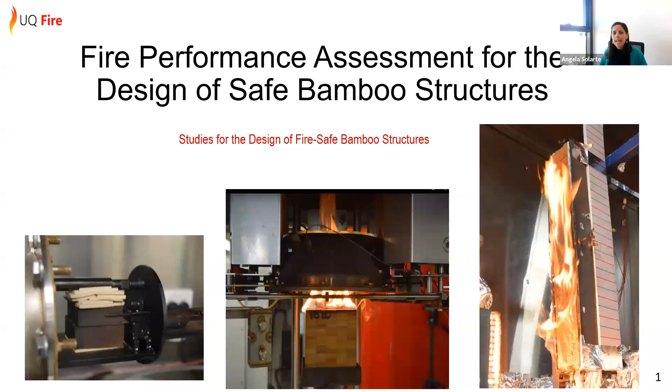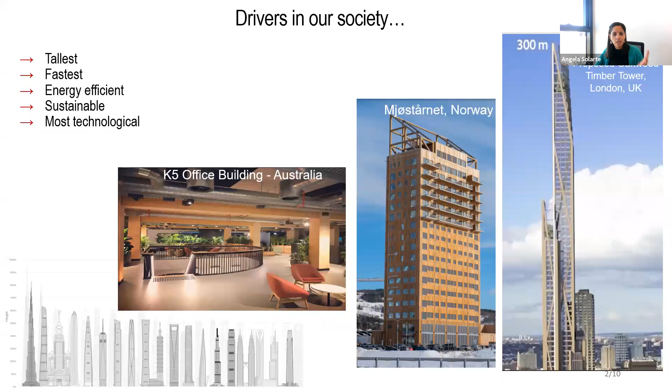It starts with the motivation. I think many of our projects are motivated because our society is pushing us in a very fast way to develop the tallest, fastest, most energy efficient, sustainable, and technological buildings. I come from industry, and I was able to see how much we did not prioritize safety and fire, and therefore we are including all these novel materials without understanding exactly what the consequences are, just thinking that we know, and developing engineered bamboo products, which are great, and aluminum composite products as well. But why are we doing this, and what can the consequences be?

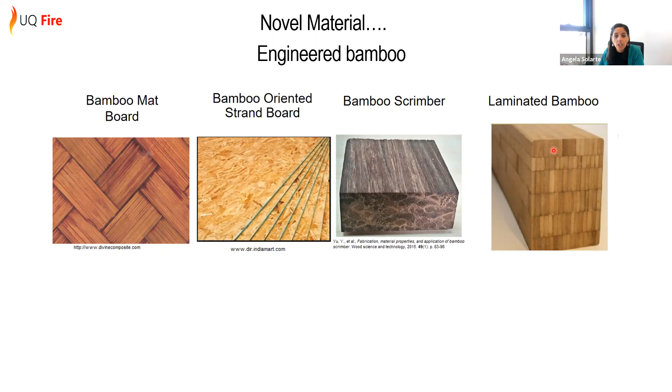So bamboo is not necessarily a novel material. We have had it since ancient times. However, we have started to engineer our bamboo, transforming it into very good construction materials, such as the mats board you can see in the picture on the left, like the mats board or the oriented strand board, the scrimber, or laminated bamboo. If you look at this picture, it looks very much like a timber beam, a CLT, or glulam, with the difference that bamboo has more small strips comprised in the laminate. You can see very small strips that are glued together to become this big beam.

Why are we introducing these materials now into construction? For their structural performance, in previous years there have been increased studies showing how great the mechanical performance of bamboo is. It has a high strength-to-weight ratio, and has been proven to some extent to be better compared with hardwoods rather than softwoods like Douglas fir, which we are using in our buildings today. Architects also love the finishing, and we are including them in products like floors, ceilings, walls, facades, etc. The good thing is that it's a really fast growing grass that reaches maturity quite quickly, and therefore it's able to sequester 30% more CO2 than pine trees.

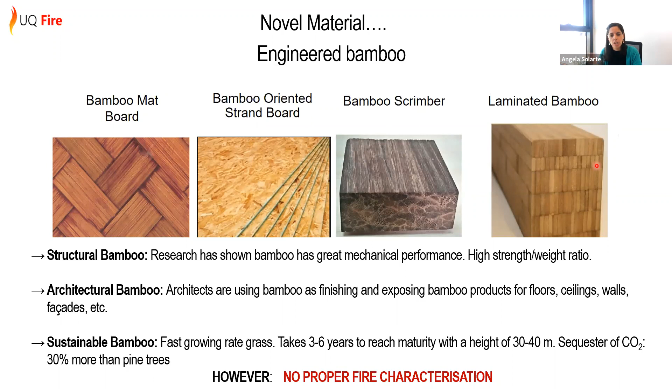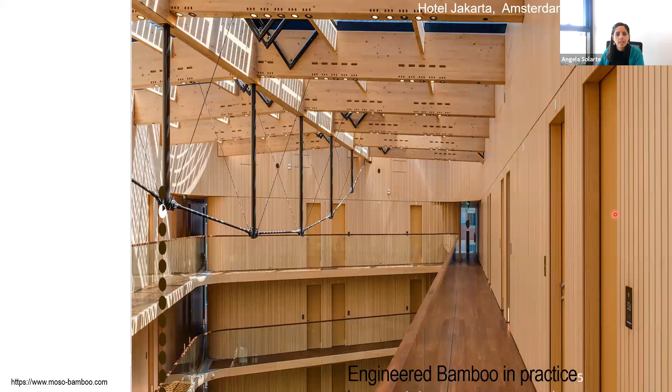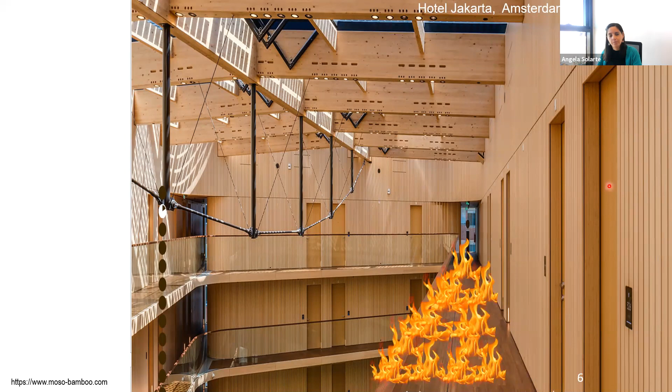But what happens if we have a fire? Do we really understand how much time we have for evacuation, and how much time we have before flashover? We all know that for performance-based design, we need to understand and guarantee that the available safe egress time is much, much greater than the required safe egress time. We know that we are confident in following our fire curve for non-combustible structures, where we are able to know when the growth phase happens to design for egress before flashover occurs. Then we are able to understand the fully developed phase and therefore design for the structural integrity of our structures.

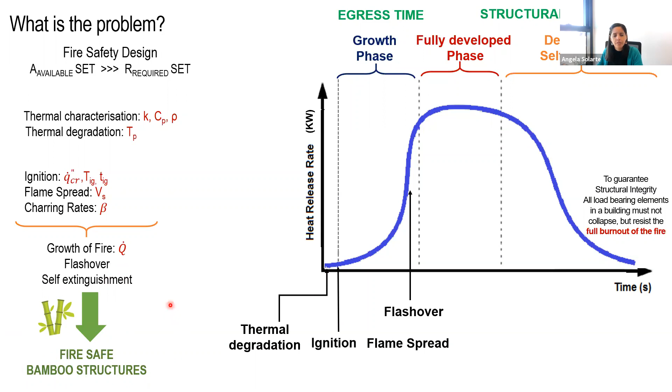To guarantee structural integrity, we know that all load-bearing materials in a building must resist burnout, so we are having to guarantee that a decay phase happens. But now we are introducing bamboo to cover buildings, as you saw in previous pictures. Do we know if we are covering them, or designing them, to be fire-safe bamboo structures?

So if a fire happened, what will be the behavior during the growth phase, and what will be the flashover times? Will it potentially be earlier than what we had initially designed for? Our people may not have enough time to evacuate, or potentially we are increasing the energy that our structure is receiving, compromising the integrity of our structure by increasing the fully developed phase and increasing the energy.

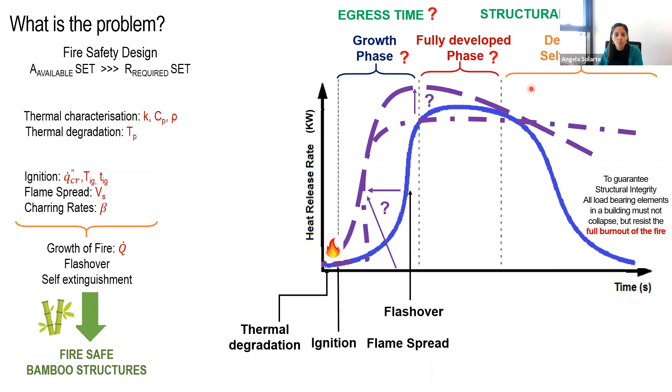And of course, if we are looking into structural integrity, are we sure that this material will be able to decay? And if it will, when and under what conditions? So all of this brings new unknowns, and for us to be able to do a performance-based design, we need to understand and start eliminating all of these interrogatory questions around what these unknowns are.

So the main objective of this research was to establish the fundamental groundwork towards performance-based design for bamboo structures. So this model was developed where, as previously seen, we are correlating each of the different phases of the fire - the growth phase, the fully developed phase, the decay phase - according to the parameters of the material, characterizing our material in these terms.

The growth phase looks into the flammability parameters of bamboo. The fully developed phase also looks at the thermal evolution and how this will occur inside the material, and whether we have self-extinguishment and hopefully achieve a decay phase - when and under what conditions that will happen. This will potentially drive us to a performance-based assessment.

But before that, we need to include, on the left-hand side of the diagram, the first information from the thermal characterization of bamboo, to understand when pyrolysis and degradation of the material happens. In the case of bamboo particularly, it's very important because of the different small pieces inside one beam column, to understand the different effects that adhesives can play as part of the input, and the different orientations that the lamella may have as part of the inputs.

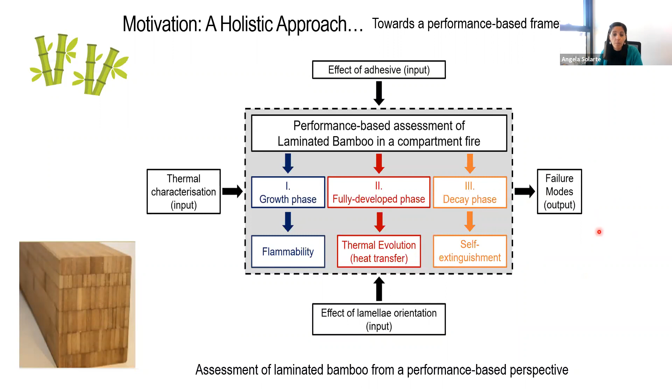So the previous model is now turned into a methodology, divided into 5 main categories. We start with the thermal characterization - here we see the input model as well - then flammability, to understand and look into the growth phase and start building the curves and the information that was lacking. Then the thermal evolution, looking into the fully developed phase.

Understanding how a bamboo compartment will develop - how much energy and how long this will take before we reach self-extinguishment, hopefully, and if we do, under what conditions. Failure modes, again in this project, is just an initial hypothesis based on the information that we have. To understand the difference of the components, we started testing 3 different types of bamboo.

The species chosen was only one - all 3 different types of bamboo are from the same species, Phyllostachys pubescens. But 3 different samples were chosen to assess and understand the effect of the adhesives. Sample A was manufactured with urea formaldehyde, polyurethane. Sample B with phenol resorcinol formaldehyde, and sample C with phenol formaldehyde.

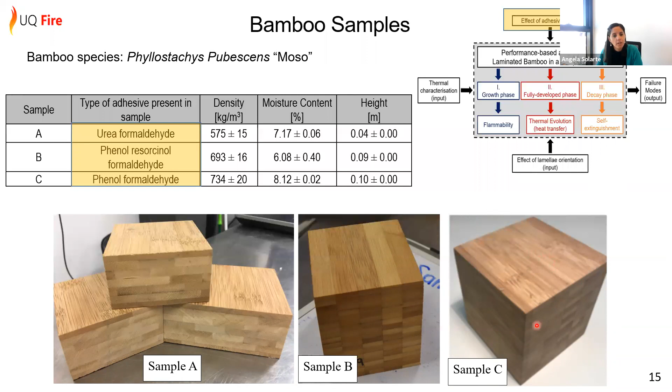From the information provided, sample A is mostly used for linings, covering bench tops, and kitchen internal designs. Sample B was obtained from a local provider here in Queensland, Australia, where the provider was hoping it could be used for external and structural uses. The third material was acquired internationally, and this is what has been used mostly in most of the big projects where bamboo has been used.

Again, as part of the model, we need to understand the effect of orientation, and this is why during the process of the tests, the 3 different samples were tested at different sides. Sample A, in this case, was tested perpendicular to the grain.

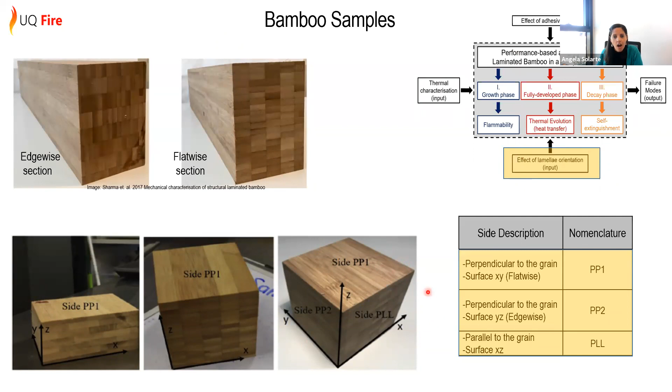Sample B is also perpendicular to the grain, and sample C—let me try to explain. Perpendicular to the grain, as with bamboo, you can allocate it in a section where the small strips are located vertically, which is called edgewise section, or in this case horizontally. This is how manufacturers commercially sell this product. So we wanted to understand the difference between each of these two, or also the parallel orientation, when heat comes from this side or from above. I'll try to walk you through the different sides and orientations along the way.

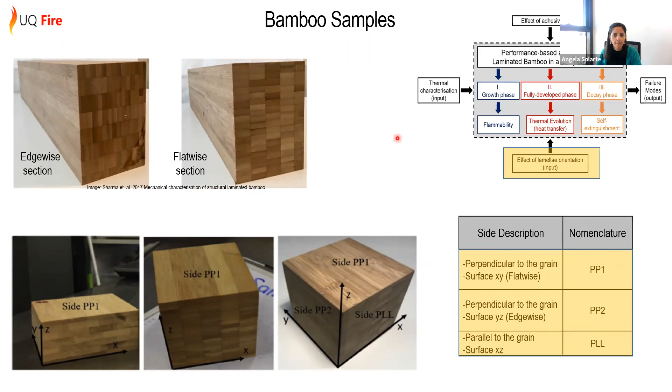As a starting point for the model input, we looked into thermal characterization, and the pyrolysis temperatures were found using thermal gravimetric analysis. Sample A, sample B, and sample C were tested in air and nitrogen. This test is used to understand the degradation of materials, run by heating at different rates: 1 degree per minute from 50 to 800 degrees, then 5 degrees per minute again from 50 to 800, then 10 and 20, to understand the different ranges and consequences of these heating rates.

For all three samples, we can observe three different peaks, showing where degradation of the material took place. The first thermal degradation peak, in all three cases, occurs around 50 to 100 degrees, caused by evaporation of water—the sample loses weight as it evaporates. The second degradation takes place around 250 to 340 degrees. I mention this range because it comes from all the different tests between 1 and 20 degrees per minute, aiming to understand the degradation range in this spectrum. The third degradation parameter occurred around 370 to 515 degrees.

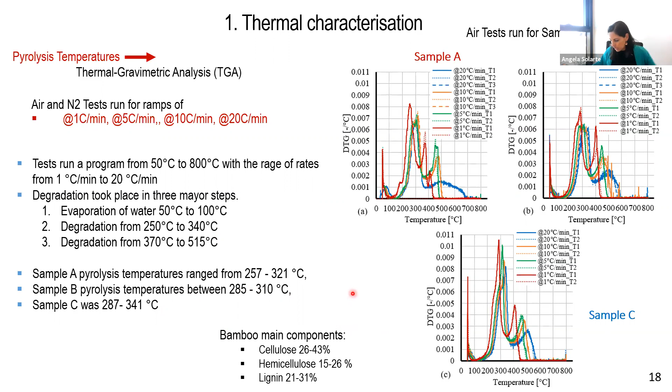Thermal conductivity was also determined as part of the thermal characterization. To find the thermal conductivity, we used the hot disk thermal constants analyzer. This process is based on the use of a transiently heated plane sensor. The sensor is placed between two different samples and conducts electrical impulses. Through application of electrical current, the temperature of the sensor increases, and the resistance of the temperature is recorded as a function of time. This TPS setup performed the application of electrical current and translated it into a thermal conductivity value.

We also did tests to understand the thermal conductivity at higher temperatures, using the same process but now inside a furnace, driving the temperatures from 50 to 350 degrees, again parallel and perpendicular to the grain. We have here the results for the three different samples.

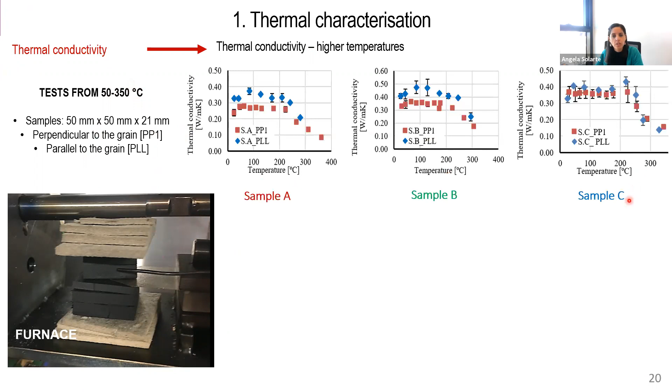If you look closely, particularly for the samples perpendicular to the grain - the red dots are the ones perpendicular to the grain - they show almost a steady state for the thermal conductivity until around 220, 225, 250.

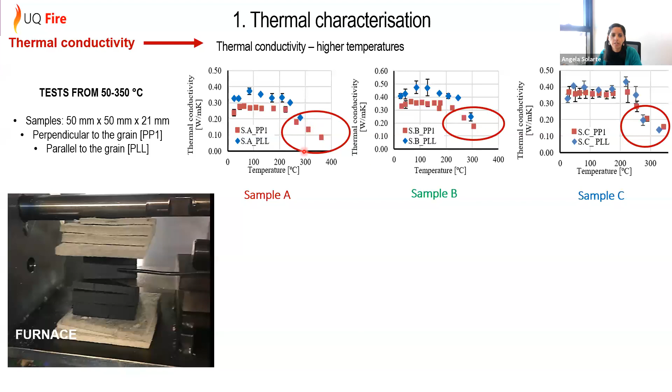Then you start seeing a drop of the thermal conductivity after this. You can see it here after the test, how the samples are charred, and therefore the lamellas have started to debond, and a lot of air gaps are now included. This is why the thermal conductivity drops noticeably in this case.

So to characterize this, we were not taking these values into consideration because this is not anymore bamboo, this is most likely char. Therefore, we averaged the values for the thermal conductivity from bamboo from 50 to 220 before the drop, which is in agreement with the tests from the degradation in the TGA shown before.

And here, we can see very clearly the difference of the higher values of the thermal conductivity parallel to the grain compared to perpendicular to the grain.

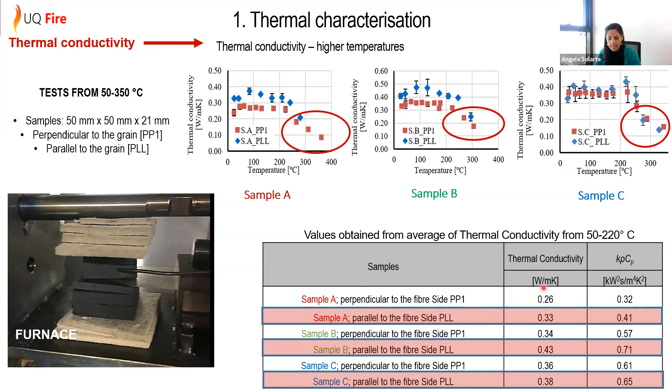Just for the sake of time, going into the next part of the project, looking into the growth phase and parameters for flammability. We started with the critical heat flux for ignition. Again, as part of the characterization, this is a lot of data that we were looking into.

The critical heat flux for ignition is very important as it represents the amount of energy that we need to reach ignition. So we used the cone calorimeter, and the idea was to use heat fluxes from 10 kilowatts per square meter to 80, recording all of the ignition times.

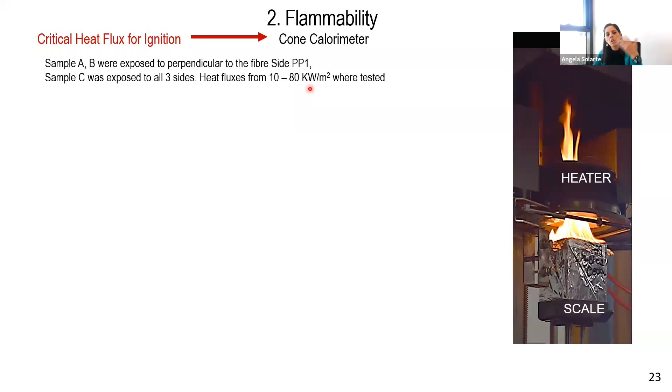Here we can see the different heat fluxes at which we exposed the different materials. Sample A and B were exposed perpendicular to the grain on side PP1, and sample C was exposed on all three sides. Here we provide the recordings of time for ignition versus external heat flux.

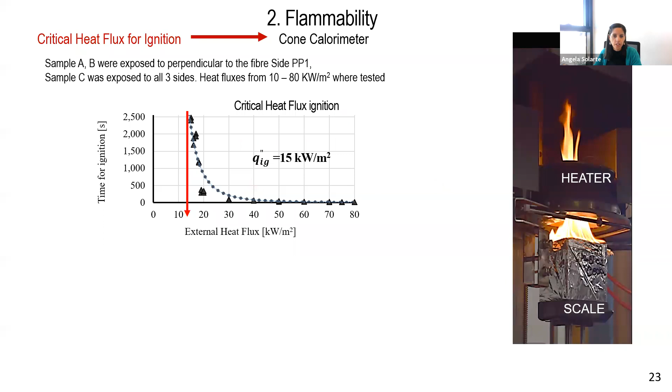Where we see this asymptotic behavior, it means that it's the minimum critical heat flux that we have before ignition. So in this case, for bamboo perpendicular to the grain, the result found was 15. You can see here that 15 was the critical heat flux found for all of the samples perpendicular to the grain.

However, sample C, which was parallel to the grain - the only parallel to the grain test - gave 14, which makes sense with what we had seen about the thermal conductivity as well before.

When compared to other timber materials, we are able to have a baseline and understand where bamboo stands. We see that bamboo has a higher, or requires more energy to ignite, when compared to the tests conducted by Ngu.

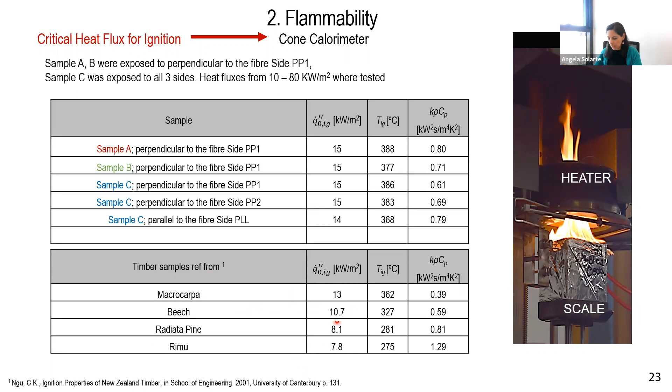but with beech, radiata pine, and rimu, and they present lower critical heat flux for ignition.

To understand another way to characterize ignition is through the critical mass loss rate. This was run through the fire point theory to understand the points of ignition conditions in terms of the decomposition of the solid.

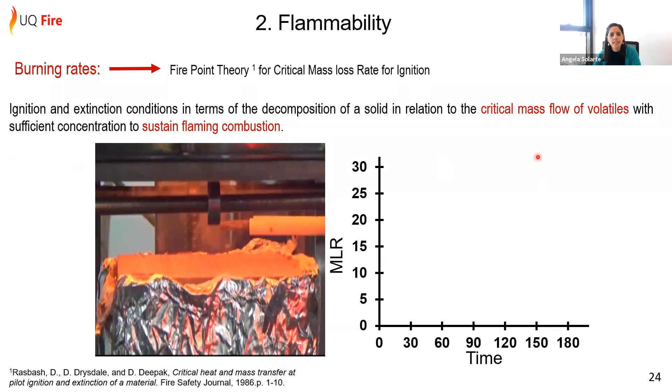This means that when we are applying energy, volatiles and a lot of flow of volatiles start to gather. You can see here the mass loss, and when ignition happens, a steep increment of the mass loss rate happens when we have sustained flaming combustion.

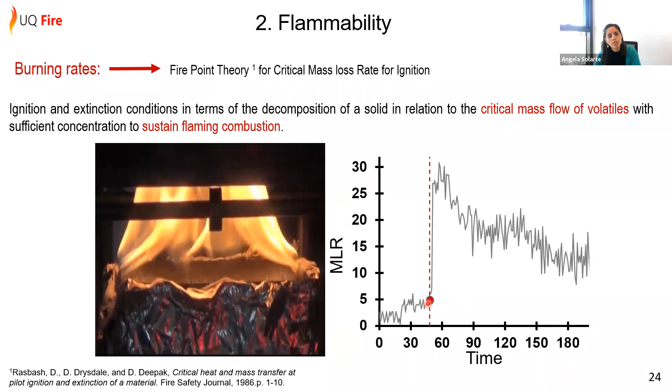Here, the recordings and measurement of the mass loss rate for ignition is done exactly at the place just before ignition happens. And in this case, the value is measured accordingly.

We tested all of the samples: sample A perpendicular to the grain, sample B as well, sample C, and sample C also parallel to the grain. Due to the way the test was developed, we were not able to understand or develop any particular differences due to the adhesive or due to whether it was parallel or perpendicular. Results, particularly for sample C, did not allow us to reach any conclusions about whether perpendicular or parallel orientation was important for ignition. So all of the data was recorded.

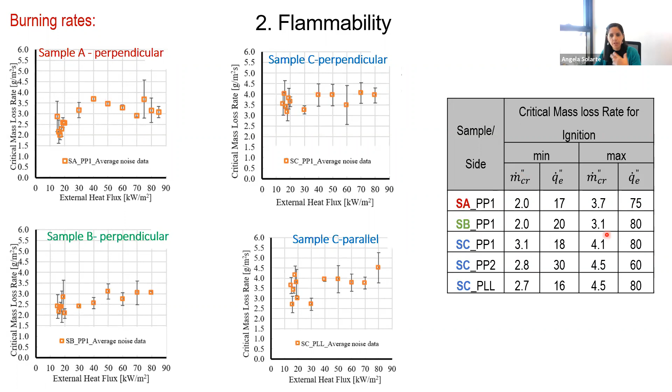This is particularly important to provide, because it enables professionals to use it as part of the input for their design parameters.

Comparing the results we got with timber products, the critical mass loss rate for ignition is important as a reference according to the heat flux or temperature measured. For sample A, the minimum critical mass loss rate was 2, with an external heat flux of 17. The maximum for sample A perpendicular to the grain was 3.7, tested at a heat flux of 75 kilowatts per square meter. Usually lower heat fluxes are associated with lower critical mass loss rates. The maximum mass loss rates here were given at 75, 80, and 60 kilowatts, with mass loss rates from 4.5 down to 3.7 depending on the sample. But we were not able to find any particular trend or behavior around any of the variables we were trying to examine.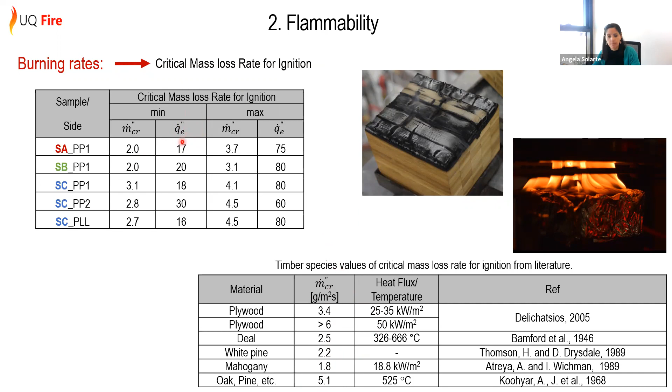For the heat release rate, it is a very important parameter we need to obtain in our design. As we saw at the beginning, it's the energy the material releases when it burns, and therefore it's important to measure and quantify how much energy will be emitted or produced into a structure. This determines the size of the fire and the amount of energy our structure will receive.

This is an example of the results for the heat release rate at 40 kilowatts. It's important to highlight that at the beginning of the sample, when ignition happens, you get a high peak of heat release rate — this is where you see the big flaming and the big measurement. But since we're dealing with a combustible, char-like material like bamboo, as soon as the sample starts developing a char layer, the heat release rate starts to decrease and reaches a steady state, until it reaches what we call the point of flame out. So in this example we have a peak, then a decrease as the char layer forms, giving us an insulated layer.

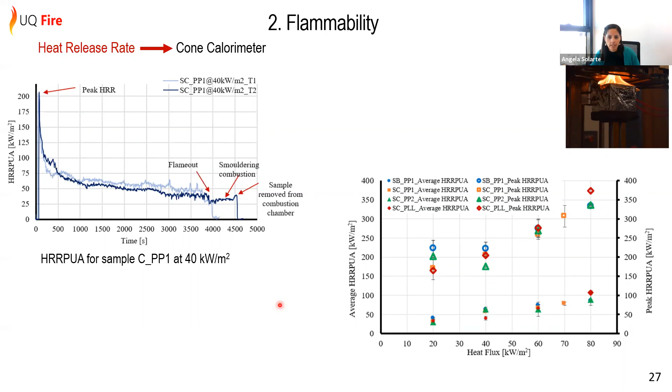Moving into the thermal evolution, and I'm going to get faster. The in-depth temperatures and charring rates were tested for samples.

We see here the delamination I was talking about for sample A. Because of this, we were not able to validate or measure the charring rates or much of the information, due to this behavior of the lamellas. I think this highlights the importance of understanding the adhesives included in the samples. If you have a product that disintegrates in early stages of a fire or even at elevated temperatures, you automatically lose the solid beam or structure, which puts the structure in danger.

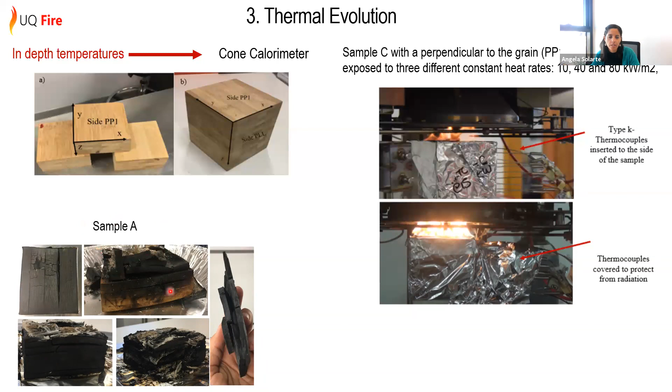The charring rates were measured using the single isotherm approach, but also through mass loss. However, I'm presenting today only the single isotherm due to time. This follows up on the isotherm we found earlier in the TGA, with the pyrolysis and degradation temperatures.

In this, we are able to present the charring rates, tracking the difference in the isotherm at 257, along the different movements in the sample. Thermocouples were introduced, and we were able to follow the char depth, tracking the 257 isotherm as it moves along and gets deeper over the time of the evolution of the sample.

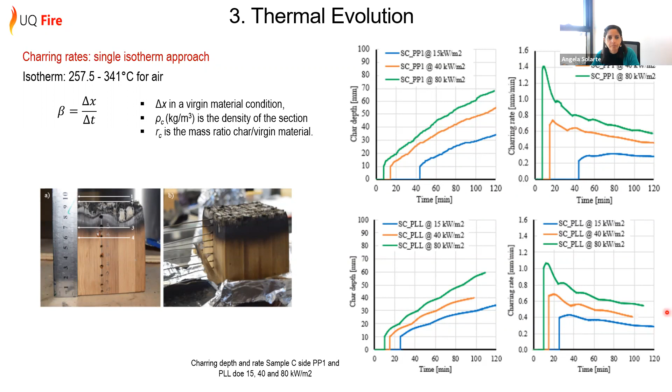More on self-extinction: to run with the remaining time, the self-extinguishment test was also examined as part of the firepoint theory, now looking into the critical mass loss rate, but for extinction, similar to the critical mass loss rate for ignition.

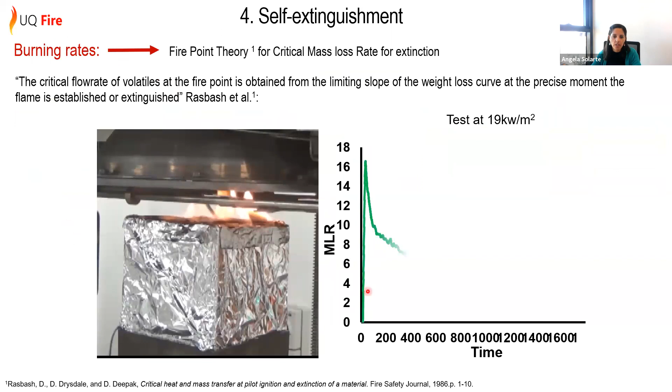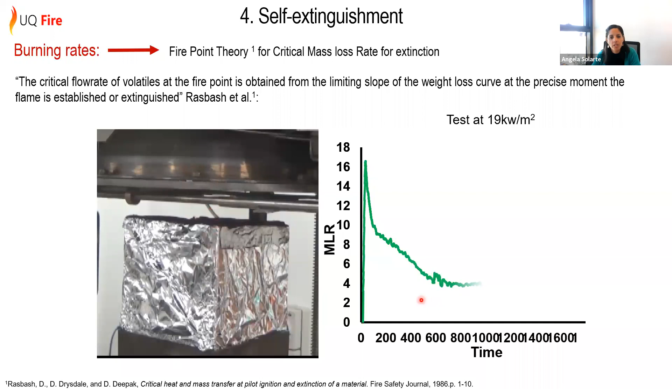After ignition, the mass loss rate increases steeply, and then as it decreases and the flame extinguishes, we start finding a steady state. This is due to the two different regimes we find in flaming combustion, and we found that this is the moment where extinction starts. We have two different regimes: flaming combustion and smoldering combustion.

In this case, we were able to measure the burning rate and the self-extinction for flaming combustion at this moment. This is an example of a test at 19, and we are calling this the flaming self-extinction.

And therefore, we are measuring that the mass loss rate for extinction in this example was 4 grams per second per square meter. This is the process that we follow for each and all of the different tests, defining that in this case, what we are measuring is the flaming self-extinction without looking into the smoldering combustion, as I previously mentioned, as this is a second part that needs to be also studied in the future.

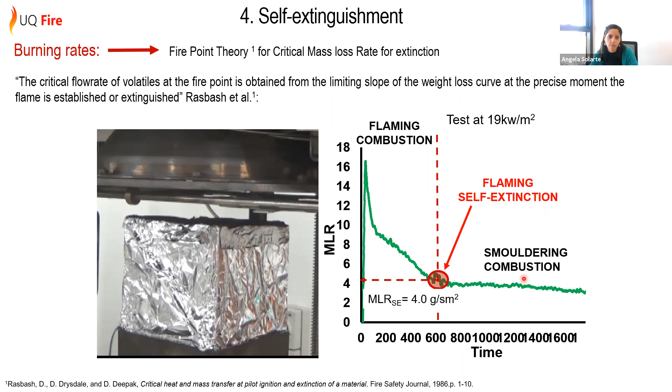So this is an example again of how it was calculated. This is the tests that were run, in this case for the samples run at 19 kilowatts per square meter. And you can see here the mass loss rate for self-extinction. Again, we have a big initial peak, and then we have a steady state.

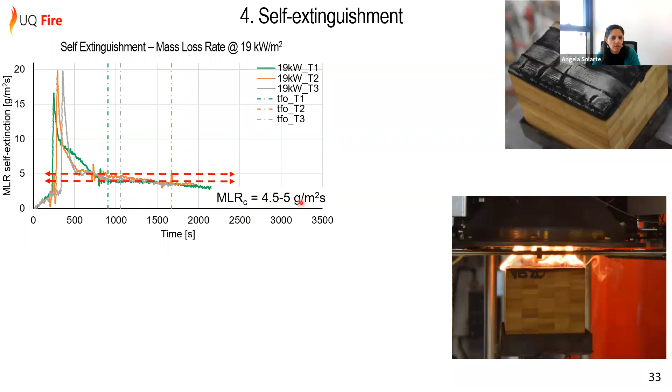Here we have the extinction. The dotted lines are where visually we were able to observe that extinction had occurred. And you see that after extinction, you still have the smoldering combustion that I was talking about before, but under the measurements of the observation where extinction happened, we are tracking and understanding that the mass loss rate for self-extinction was in this case 4.5 to 5 for each of the 3 tests.

So these are the results that we obtained for the samples. You can see that after all of the samples were tested, from 15 up to 40, we obtained critical mass loss rates from around 3 to 5.5, depending on the different type of sample, but there was no self-extinction after 40 kilowatts per square meter. So all of the samples tested at 40 and above, 50 and above, all of them measured burnout. We were not able to observe extinction or flaming extinction, and therefore this is the value that was set for critical heat flux for self-extinction for bamboo in this particular test, as there was no delamination observed for sample C.

And it's very important to say that all of these tests were conducted horizontally. So if you have a different set of tests tested vertically, this will potentially give different results, as we were talking about the delamination or the fall off of the lamellas, and this could potentially have a different result. But for the cases that we tested, all of them were tested horizontally, and therefore for our case, self-extinction did not happen after 40.

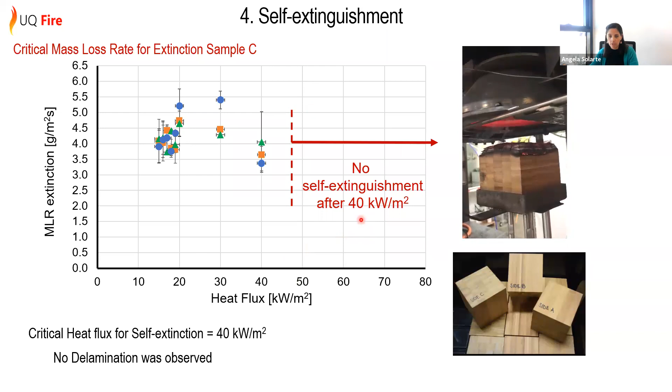Comparing values again to timber species, we are able to track that the mass loss rate for self-extinction at fire point was, for example, A, B, and C: 3.64, 4.05, and 3.37. There was not a particular difference depending on the orientation of the sample.

And we can see here that for European spruce, pine, and particle board, we are having similar values in agreement with the mass loss rate at fire point. In this case, much of them are around 3.93, 3.48, which are similar to the mass loss rate at fire point for bamboo. This measurement was at 30 kilowatts per square meter for the test, this particle board was at 35, and this European spruce was at 43.6, and these are the values of the samples tested at 40 kilowatts per square meter.

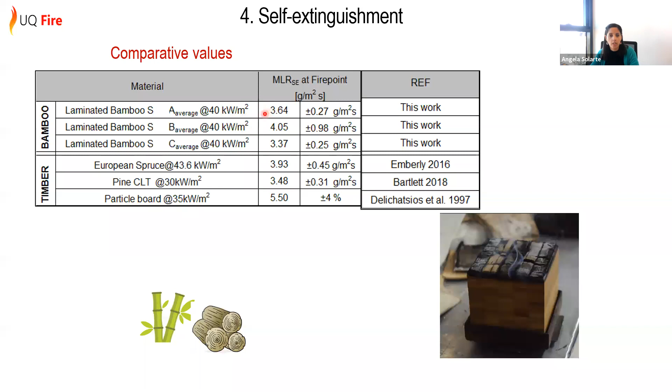So moving along into the fifth part of the failure modes. Again, just as part of what I said at the beginning, these previous sections from 1 to 4 are several different tests characterizing the properties and parameters in thermal characterization, flammability, thermal evolution, and self-extinction, to start putting together the data that we need.

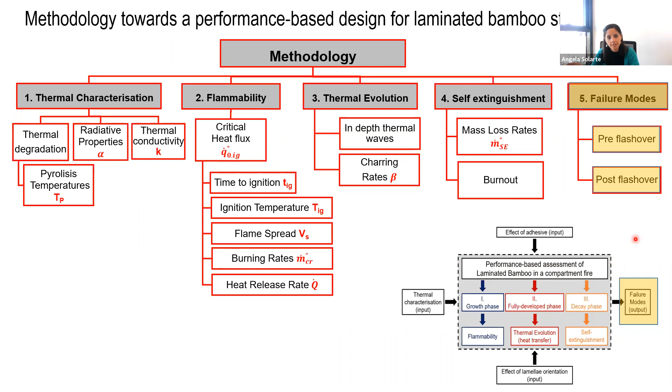We need to provide this data for us to be able to build bench scale testing. Now the idea of this section is just to create an understanding of all of the information that we have provided. Where does it stand and what's next? So we have looked into all of the different tests that I have just shown you, trying to understand where we're at in this puzzle where we have so many questions, and we are starting to provide much more information.

Now we know where ignition happens. Now we know under what conditions, and we know that self-extinction at this small scale is happening before 40 kilowatts per square meter. So all of this information is just here in what we call the bench scale fire testing, looking into fundamental properties. But we now need, for this to scale up and for us to be able to create more knowledge, to do future work into what we call full scale testing, looking into compartment and flashover in real scale testing, to be able to validate what this model will look like.

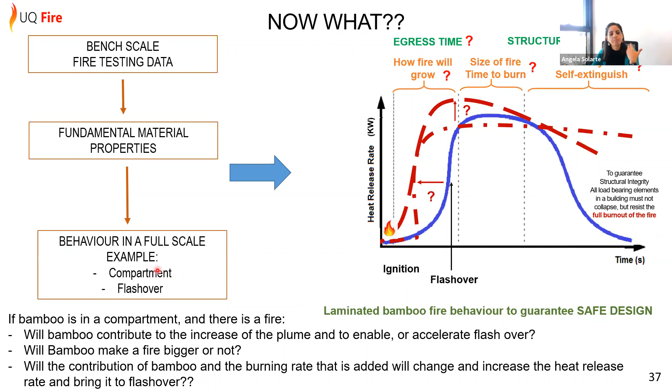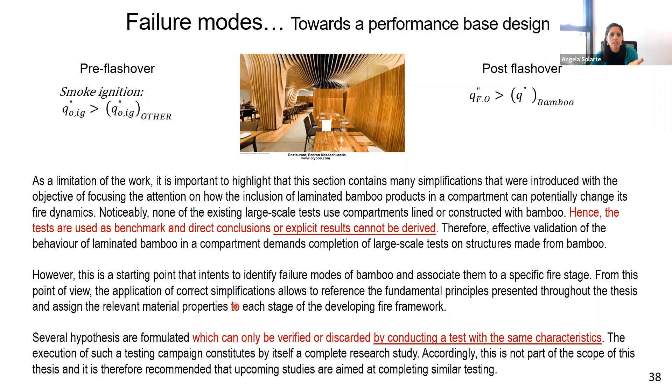In this case, to be able to look into higher scales, we need to understand and develop more testing. I wanted to provide a bit of a reference from the bench scale test and look into what would happen potentially, just as a hypothesis, and where does bamboo sit. Let me explain, this is a test that was run...

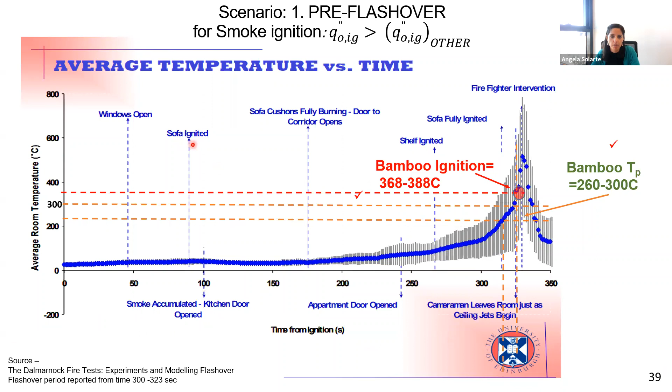So not necessarily bamboo is going to be critical in the ignition part, and it will not contribute to early ignitions of a compartment. But again, this is just a hypothesis, and the idea of this today was just to provide a bit of a reference of what are the variables, or where bamboo stands along in fire, in this sort of examples. Again, these tests are used as a benchmark, and we cannot draw direct conclusions, but this is just part of what we are trying to give as an example.

So again, if this was or is incombustible, and now if we were going to hypothetically introduce bamboo lining in these walls, what would potentially happen? Again, this is just a hypothesis, and this is a very, very simplified way to put in context the hazards of putting different materials without understanding their behavior.

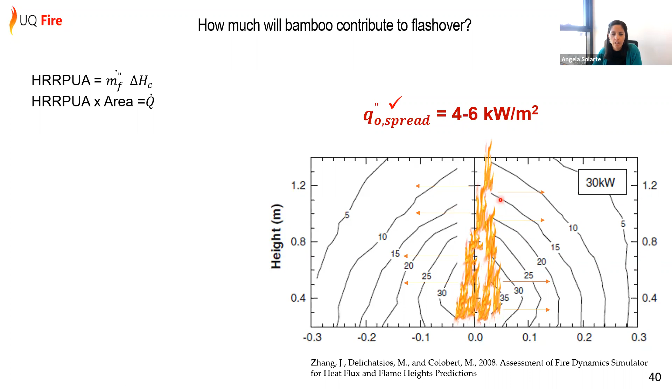So assuming that we will have flame spread around these sites, we know from the data we have that the fire, or the lining, will spread, and assuming that we have only horizontal spread, the area that this will affect is the yellow section. And therefore, if we have that the heat release rate per unit area is the mass loss rate times the heat of combustion, we know with this that the heat release rate is equal to the mass loss rate.

Now we know a value of bamboo in a particular scenario, 3.5 grams per square meter. That will be the value that we are including now. The heat of combustion in this case is 19.4.

And we are saying that this now has a value of 67.9. So what does that mean? The heat release, which is the heat release rate per unit area times the area, looking into that orange or yellow area in this case, where we now have spread and bamboo has released its energy, we will have an area of 0.73 meters squared, and therefore we'll have a heat release of 50 kilowatts. So again, the area is just associated to the value of where the spread has come.

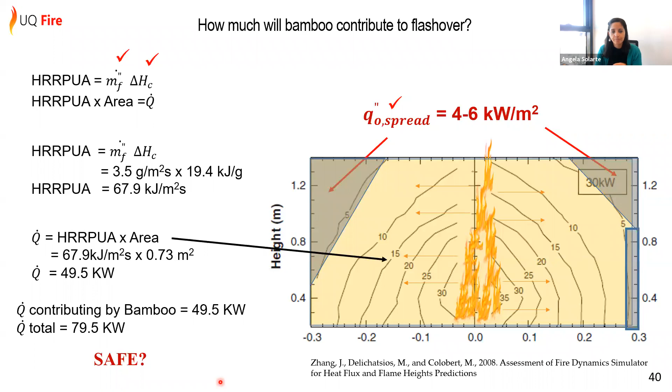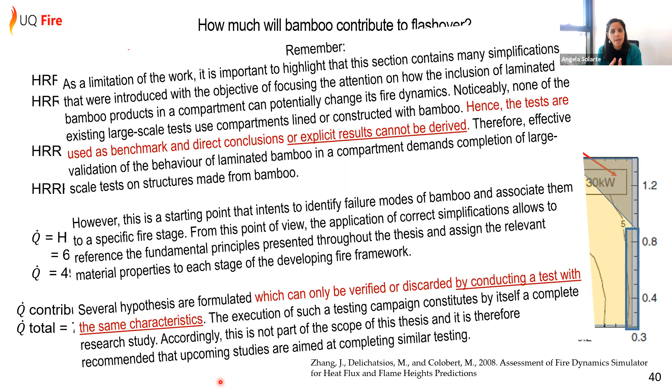Again, I think that the most important part of this is that we need to continue this test, because these two examples that I gave you were more likely to understand what are the potential failures that we can have, and also to understand that these hypotheses need to be verified or discarded by conducted tests that have the same characteristics. So again, the idea and the message is there's more to do.

This study has started with bench scale testing, small scale testing, and you will find Dr. Ian Pope looking into thermal behavior and heat transfer, not only in bamboo, but some of his work is in bamboo. So if you're interested in looking at that, we need to go now into medium scale for future studies.

And Dr. Mateo has also looked into structural behavior, and I encourage you to look into both of their work. But to really understand, to really assess what I have just shown in the last two slides, trying to challenge you, we need medium scale fire testing, and we need full scale tests to be able to predict and to be able to design safely.

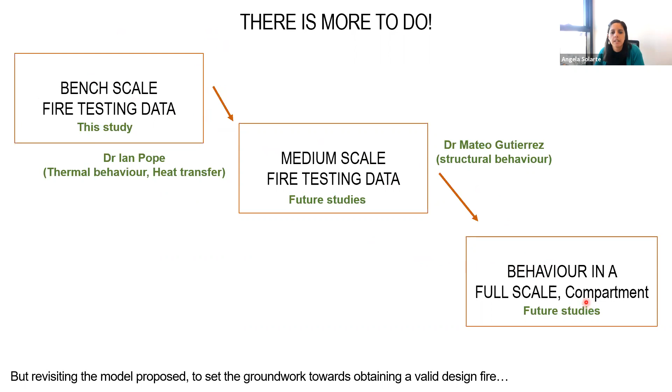But we now have an initial part, but we're still missing the following parts of where bamboo stands.

So again, as concluding remarks and to finish up, these tests are only done for horizontal configuration, and there's a lot more to do for vertical configuration, because we have seen that the lamella, if you're using polyurethane, it's very critical because it falls off, it disintegrates, and therefore you stop having the complete solid mode.

You have a burnt material that delaminates and falls off, and therefore the fire dynamics will completely change and the characterization will be different. More testing needs to be done to understand and lead into a better understanding of the heat transfer process, and that's part of what Ian has been looking into.

And other types of engineered bamboo need to be tested. This is just one laminated bamboo product, but as we saw at the beginning, there are many more products that are being used in construction, and therefore it's critical - if just by looking at one we are able to see the implications that it potentially brings, then we do need to look into the same framework for other materials.